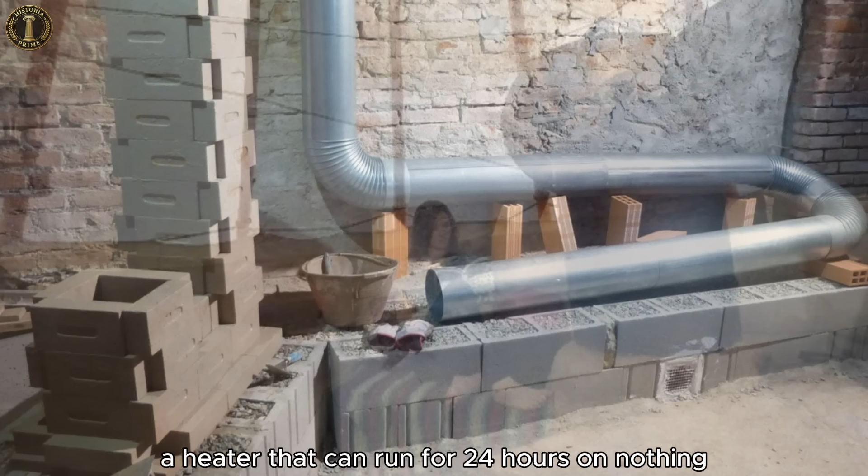Yet thousands of homesteaders quietly rely on it. A heater that produces the same warmth as a modern furnace without a gas line, without electricity, and without the grid. A heater that can run for 24 hours on nothing but an armload of dead branches you gathered for free. This isn't speculation. This is a heating system that burns 80 to 90% less wood than a traditional fireplace.

You light it once in the morning, it roars clean and hot for barely half an hour, and then it stays warm all day and all night, without another touch.

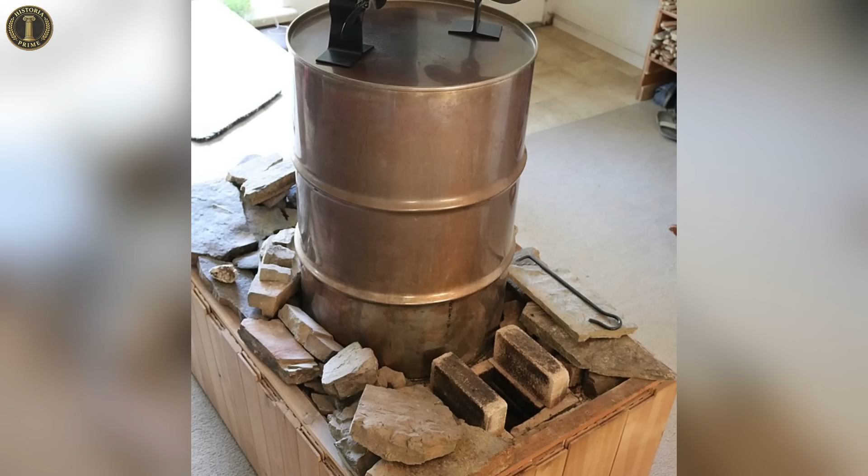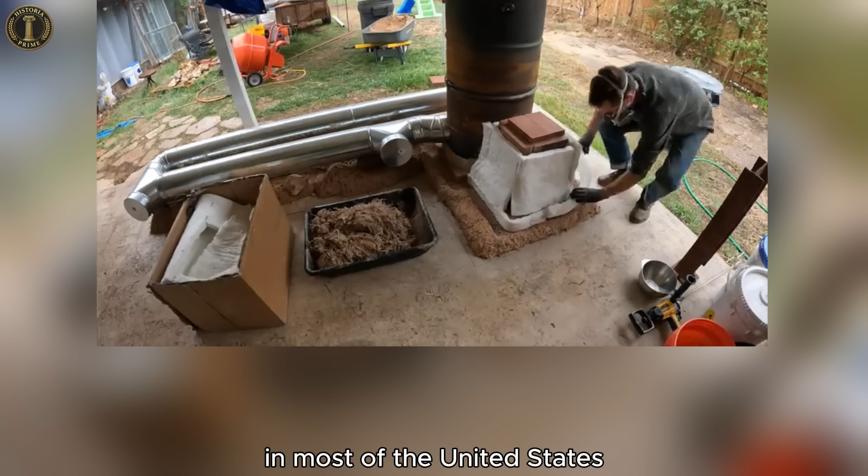People are using it right now to survive winters that freeze entire regions. They build it for under $300, often in a single weekend. But the moment you try to install one legally in most of the United States, you hit an invisible wall, built not by physics, but by an industry that profits from keeping you dependent.

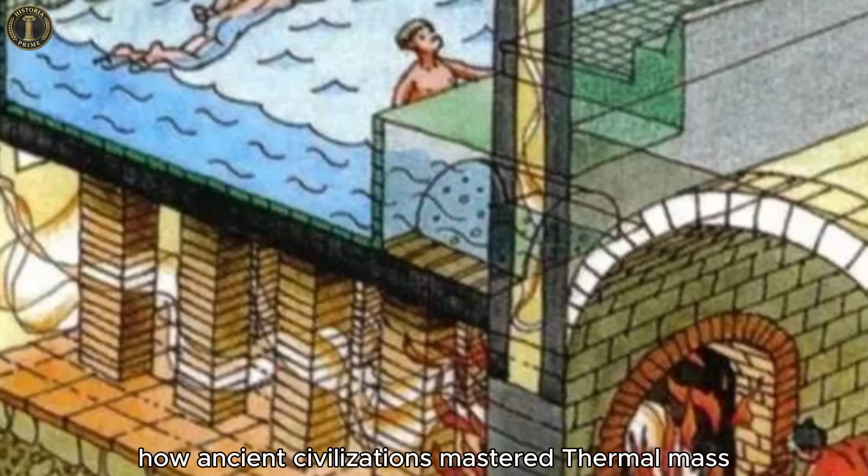Today we journey through ancient engineering, modern rediscovery, and the corporate maze that quietly shaped what you are allowed to heat your home with. This is the story of the rocket mass heater, how ancient civilizations mastered thermal mass, how modern society forgot it, how a handful of renegade engineers revived it, and why powerful interests moved quickly to keep it out of your living room.

By the end, you may find yourself asking a dangerous question. How much of our dependence on modern heating is necessity, and how much of it is a trap we were never meant to escape? Part 1: The Lost Wisdom of the Ancients.

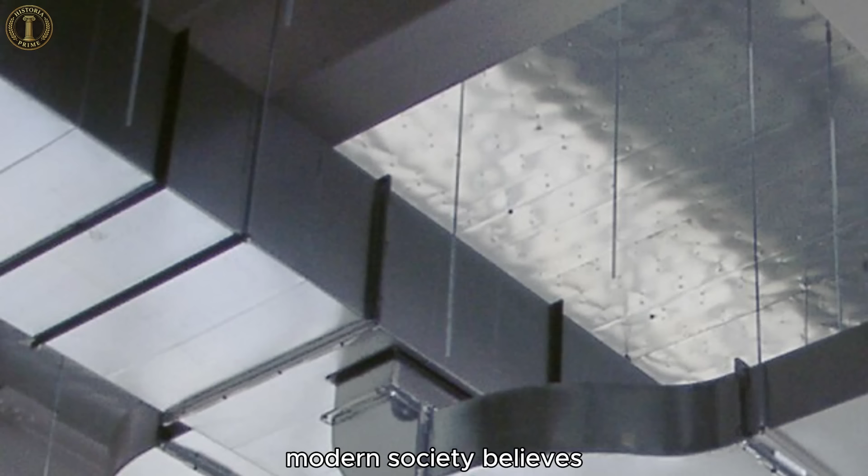To understand why the rocket mass heater is so extraordinary, we have to look back to a time when humanity understood heat very differently. Modern society believes warmth comes from blowing hot air into a room. The ancients knew better. They mastered thermal mass, using stone itself as the heater, long before we forgot the principle.

Travel for a moment to the Roman Empire. Engineers there faced a daunting challenge: keeping vast stone bathhouses warm from dawn until night without feeding fires endlessly. Their solution was the hypocaust, a system whose name means fire beneath. Instead of putting the heat inside the room, they put it under the floor.

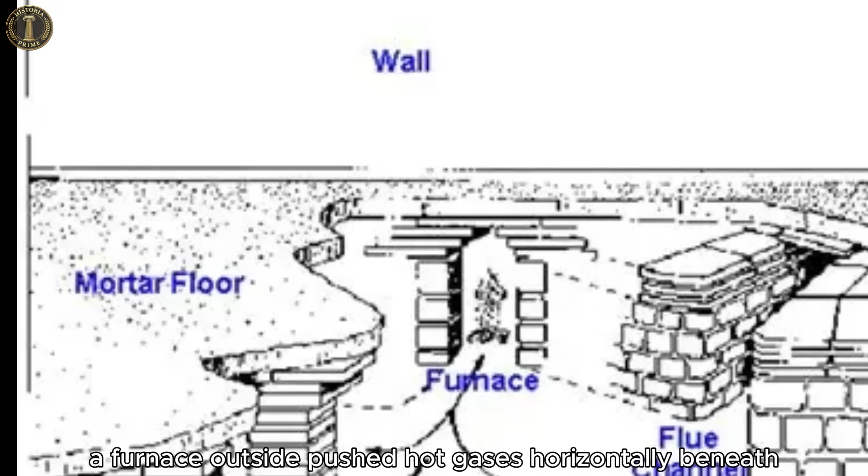The stone floor was lifted on small pillars, creating a hollow space. A furnace outside pushed hot gases horizontally beneath the entire structure, allowing the stone to soak in the heat and release it slowly for hours. Bathers weren't warmed by air, they were warmed by radiant heat from the very bones of the building.

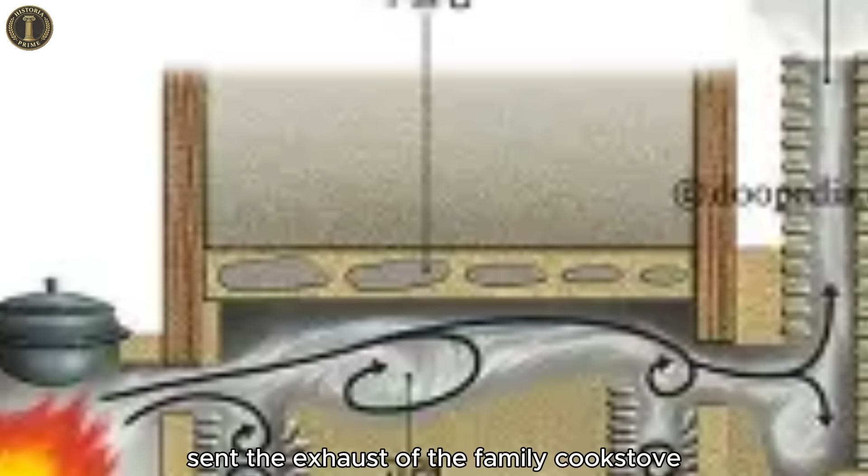Half a world away, ancient Korea arrived at the same principle and refined it for daily life. Their Ondol system sent the exhaust of the family cook stove through winding channels beneath thick stone floors. As the gases cooled on their journey, the stones above grew warm. One evening meal could heat a home until sunrise. The fire was brief; the stored heat was lasting.

Both cultures discovered the same truth: the fire is not the heater, the mass is. The energy is captured, stored, and given back slowly, almost like a natural battery. Nearly all the fuel's heat remains inside the home instead of escaping into the sky.

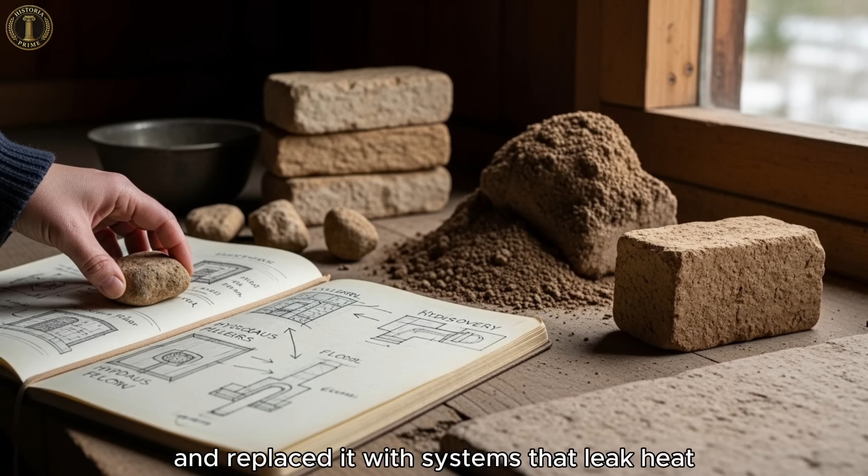This elegant survival technology sustained empires and entire civilizations through brutal winters. Yet in the last century, we abandoned it and replaced it with systems that leak heat, require constant fuel, and fail the moment the grid goes dark. The rocket mass heater is not new. It is a rediscovery of wisdom we once understood instinctively and then forgot.

Part 2: The Modern Amnesia and the Birth of the Rocket.

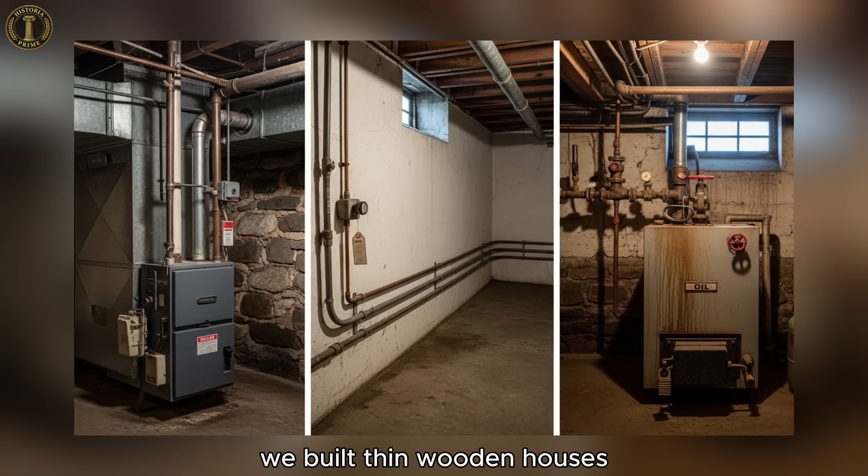When the 20th century arrived, it came with a dangerous illusion that energy was limitless and always available. We built thin wooden houses and filled them with machines designed to blow hot air into empty space. Forced air furnaces, baseboard heaters, oil boilers, systems that worked beautifully right up until the moment the fuel supply faltered.

One winter storm, one downed power line, and a modern American home could turn into a freezing wooden shell in hours. Yet these systems generated profit. They required fuel deliveries, replacement parts, annual maintenance, and constant consumption. A warm stone floor that held heat for free until morning offered no business model.

And so the ancient logic of thermal mass slowly disappeared from our collective memory. But in the 1970s, a small group of ecologists in Oregon began to question the entire structure. The Aprovecho Research Center, founded in 1976, set out to design low-cost, low-tech solutions for communities without reliable electricity. Billions of people still cooked over three stone fires, losing almost all their heat and filling their homes with smoke.

Among Aprovecho's founders was Ianto Evans, a Welsh ecologist steeped in traditions of building with earth. He believed simple materials could outperform industrial systems if guided by the right physics. Their early attempt, the Lorena stove, revealed how unforgiving those physics could be. Its clay walls absorbed too much heat, wasting wood instead of saving it. Efficiency on paper turned into inefficiency in practice.

The turning point came with mechanical engineer Dr. Larry Winiarski. He stripped combustion down to first principles and recognized two universal failures: fires that burn too cool to consume their own smoke, and fireplaces that send most of their heat straight up the chimney. His solution was deceptively simple: make the fire hotter, let it burn more completely, and trap the heat long enough for it to be useful.

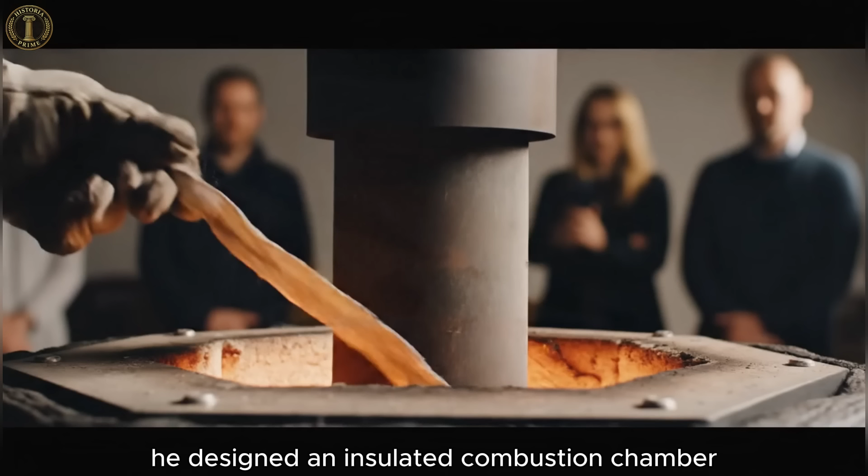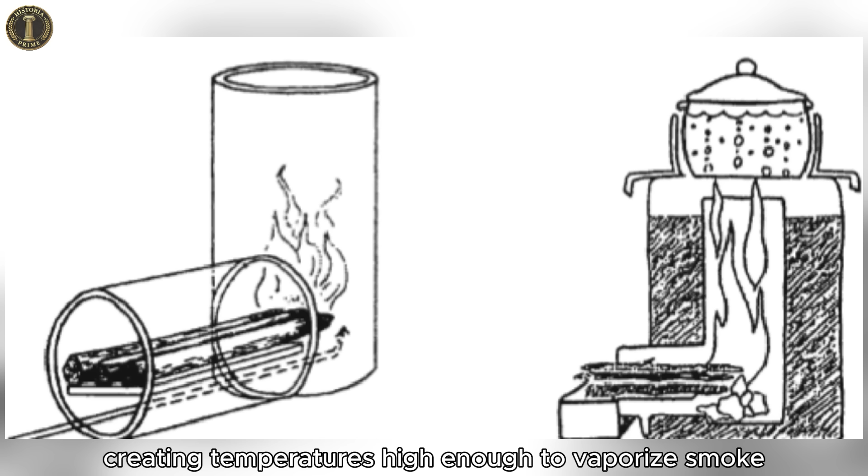He designed an insulated combustion chamber and a J-shaped feed tube that allowed wood to burn sideways and then erupt upward into a superheated internal chimney. The insulation locked the heat inside, creating temperatures high enough to vaporize smoke and generate a powerful natural draft. More draft meant more oxygen meant cleaner combustion, and cleaner combustion meant more usable heat.

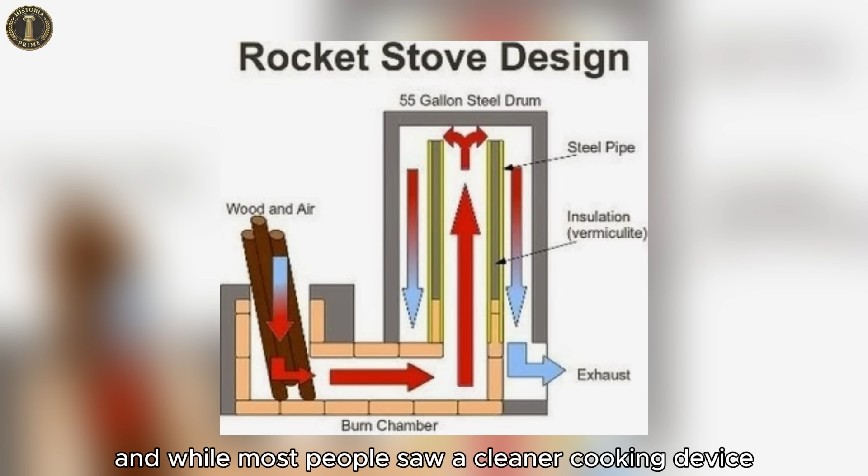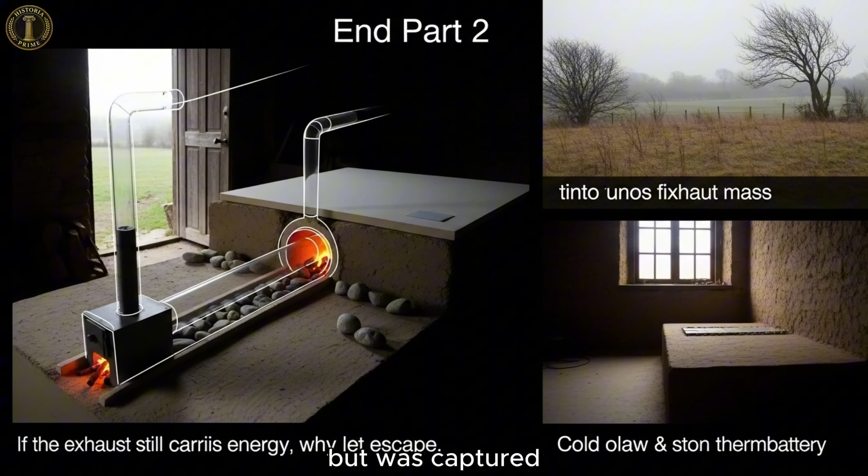When it ran, it sounded like a small jet engine. Tests showed it cut fuel consumption nearly in half. Winiarski called it the rocket stove. And while most people saw a cleaner cooking device, Ianto Evans saw something far bigger. If this fire burned so efficiently, and if its exhaust carried so much energy, then the next question was inevitable: what would happen if that heat weren't allowed to escape at all, but was captured, stored, and slowly released through the night?

Part 3: The Anatomy of a Dragon. There is a flaw at the heart of every conventional wood-burning device. The fire inside them produces enormous heat, yet the hottest, most energy-rich gases escape untouched. In a typical fireplace, exhaust temperatures can exceed 600 degrees Fahrenheit. That is not abstract waste heat.

That is your heat, your fuel, your labor, drifting straight into the sky. Even a modern certified stove still sends hundreds of degrees up the chimney, carrying away most of the energy you meant to keep. Ianto Evans asked a question almost no one else dared to ask: what if that heat didn't escape at all? What if the rocket stove's blazing exhaust could be captured, slowed down, and stored before it ever reached the outside air? Understanding the rocket mass heater is like examining the anatomy of a sleeping dragon.

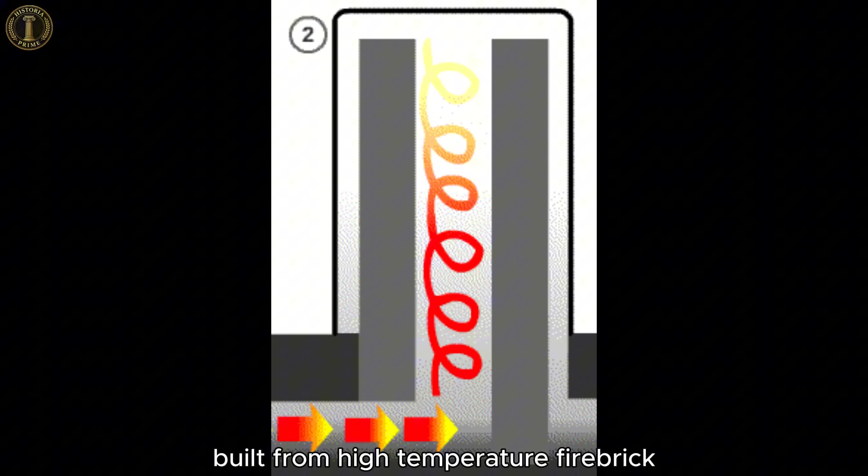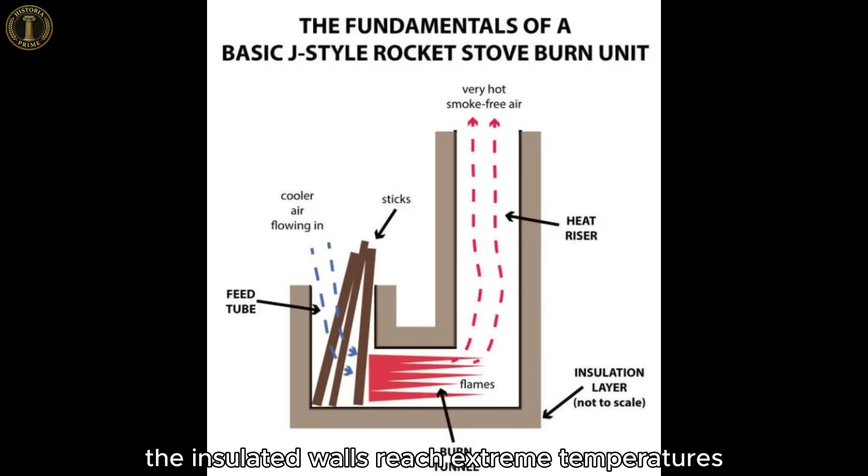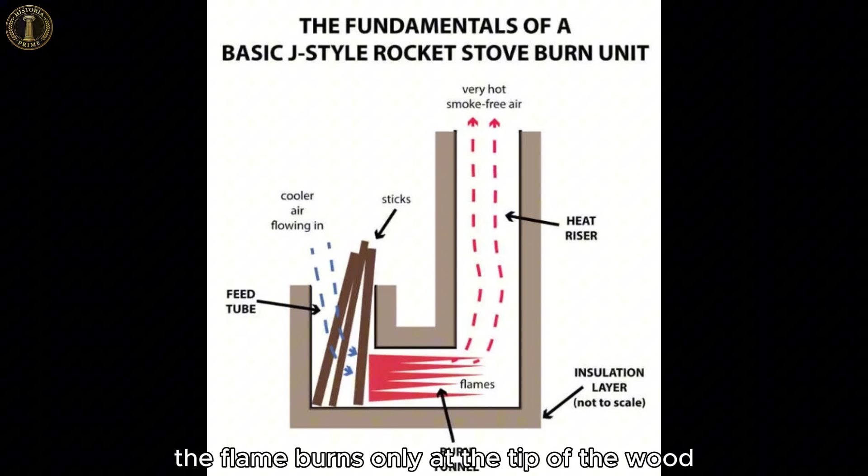At that threshold, the system transforms. The draft strengthens, the feed tube begins pulling oxygen automatically. The flame burns only at the tip of the wood, consuming every molecule of fuel it can reach. Smoke, the sign of wasted energy, disappears into the vortex and is burned completely. The barrel radiates quick, immediate warmth, but the exhaust does something far more interesting. Instead of rising up a chimney, the gases are pushed downward and into a long horizontal run of ducting. That duct snakes through a massive bench of earth, clay, sand, and straw packed together into a dense thermal battery.

As the gases travel 20 or 30 feet through this mass, the earth pulls the heat out of them. By the time they reach the exit chimney, the temperature has dropped to around 100 degrees. What leaves your house is not smoke, but mostly water vapor and carbon dioxide.

Inside the bench, however, all that energy has been stored. Hundreds of pounds of earth slowly warm and then release their heat steadily over the next 12 to 24 hours. The surface stays around 90 to 100 degrees, warm to sit on, safe to touch, and comforting through the coldest nights. With a single 45-minute burn, using an armload of free twigs, an entire home can remain warm while a blizzard howls outside.

No electricity, no gas line, no dependency on the grid. For roughly $300 in materials, anyone can build one. It is efficient, elegant, and astonishingly powerful, an engineering triumph hiding in plain sight.

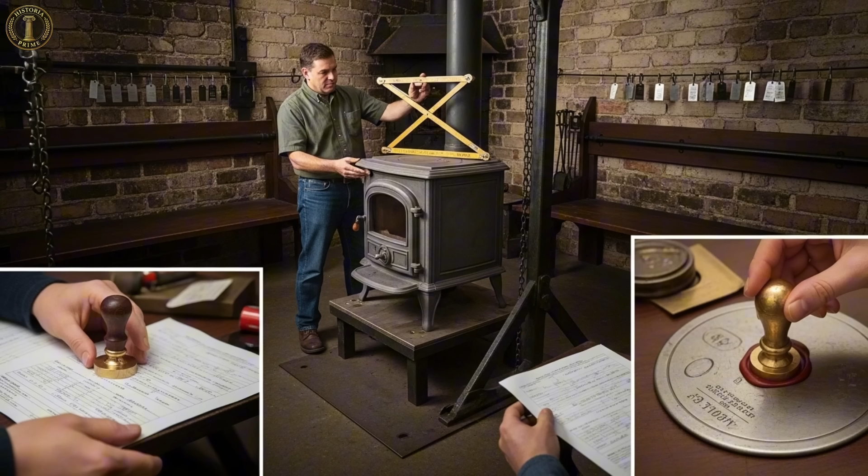This barrier is the International Residential Code, the rulebook that governs nearly every structure built today. And within that code is a simple requirement: any wood-burning appliance must be listed and labeled by an approved testing laboratory. In practice, that means Underwriters Laboratories. UL testing is the golden stamp that makes an appliance legal.

But here is where the system reveals its true shape. Sending a single wood stove through UL testing and EPA emissions certification costs upwards of $50,000. For a corporation producing 10,000 identical stoves, that fee barely registers. It's a business expense. They spread it across their entire product line and move on.

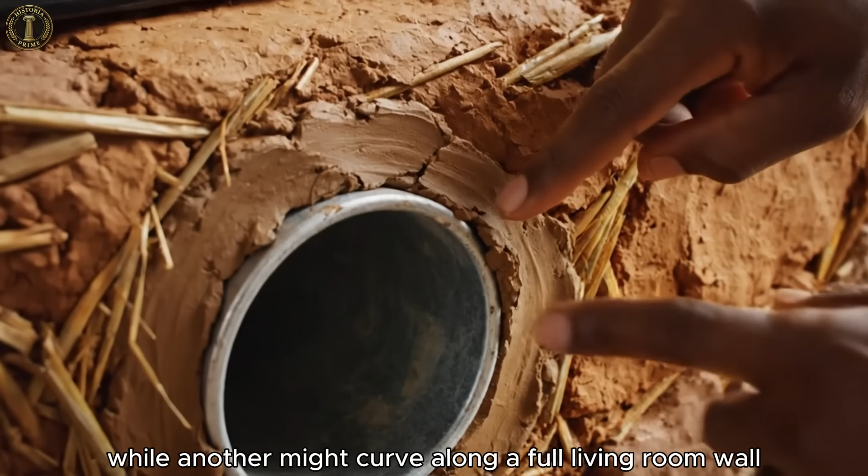A rocket mass heater, however, cannot pass through this system. Not because it is unsafe, but because it isn't a product at all. Every RMH is site-built. One bench might be short and compact for a tiny cabin, while another might curve along a full living room wall. One owner uses clay-rich soil, another uses sandier earth. No two are identical. There is no factory, no assembly line, no model number to certify.

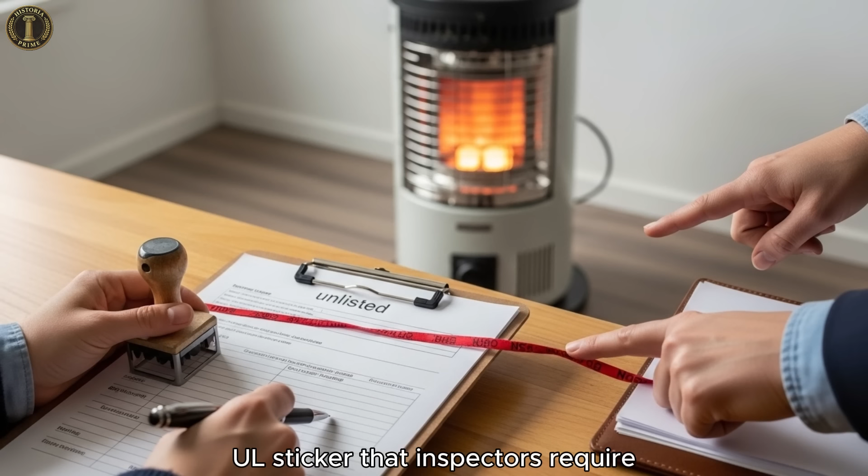And so there is no pathway to attach the magic UL sticker that inspectors require. A building inspector sees cob and ducting and a bench built from the earth beneath your feet, and they are obligated to say the same words every time: unlisted device, tear it out.

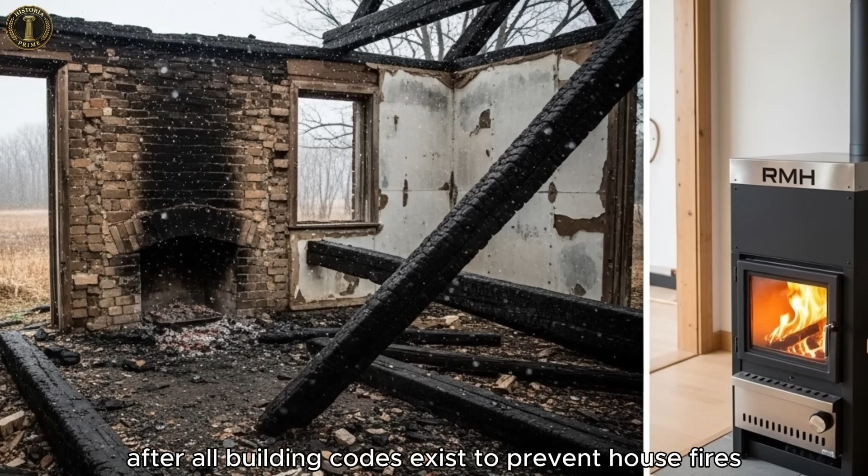At first glance, it sounds like sensible protection. After all, building codes exist to prevent house fires. But the moment you compare these rules to one particular exception, the logic collapses. Because masonry heaters, like the German Kachelofen, operate on almost identical physics. They burn hot and fast, store heat in a massive stone core, and release it slowly over the next 24 hours. They are, in principle, the same thermodynamic machine as the rocket mass heater.

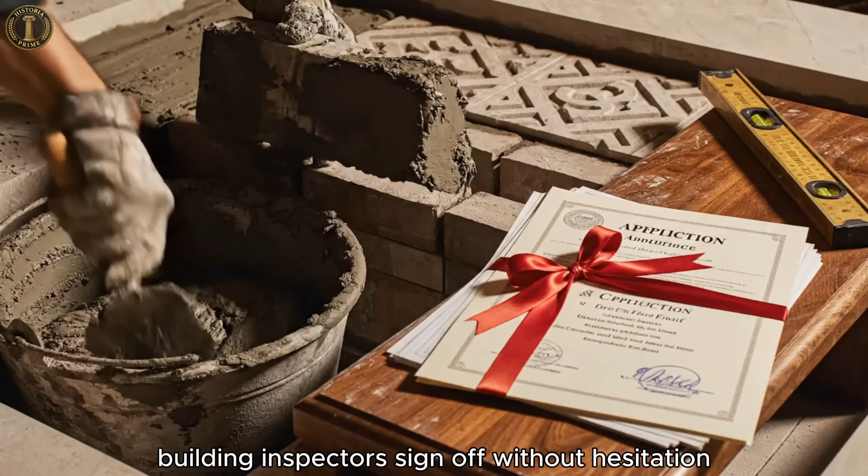Yet masonry heaters are perfectly legal. Insurance companies approve them. Building inspectors sign off without hesitation. They appear in luxury homes across Europe and North America. And the reason has nothing to do with safety or engineering.

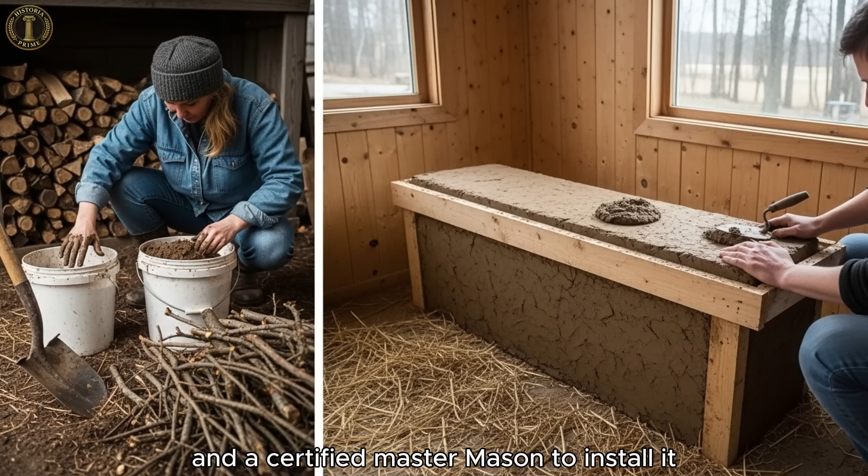A masonry heater costs between $10,000 and $30,000 to build. It requires specialized refractory parts and a certified master mason to install it. A powerful trade organization spent decades lobbying for its inclusion in the code. It fits neatly into the economic structure of the industry.

A rocket mass heater, by contrast, costs $300 and can be built in a weekend by a rural family using earth from their own backyard. It removes dependency. It removes profit. It gives ordinary people the ability to heat their homes without paying a single recurring bill. And that is the difference the code was never designed to handle. Once an RMH is inside your home, its legal shadow follows you everywhere.

Try to sell your house, and the heater becomes a material defect. Try to insure your home, and the company can deny coverage outright. If your house suffers a completely unrelated electrical fire, the dirt bench in your living room gives the adjuster the excuse to void your entire policy.

No one arrests you. No one sends a warning letter. The enforcement is quieter, deeper, and far more effective. It works through paperwork, liability, and fear. It ensures that the one heater designed for ordinary people, clean, cheap, and nearly free to operate, remains locked outside the walls of any home built by the rules.

And so the rocket mass heater is not outlawed by fire, but by the invisible architecture of bureaucracy itself. A system designed to protect homeowners has quietly become the wall that prevents them from ever becoming truly independent.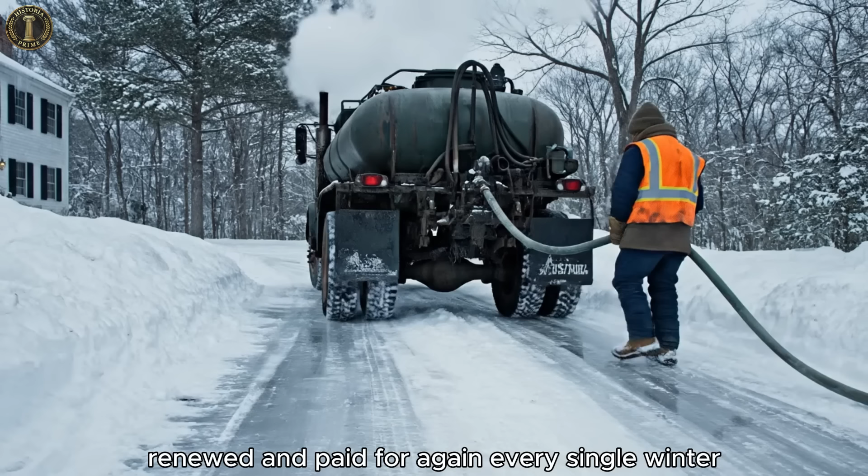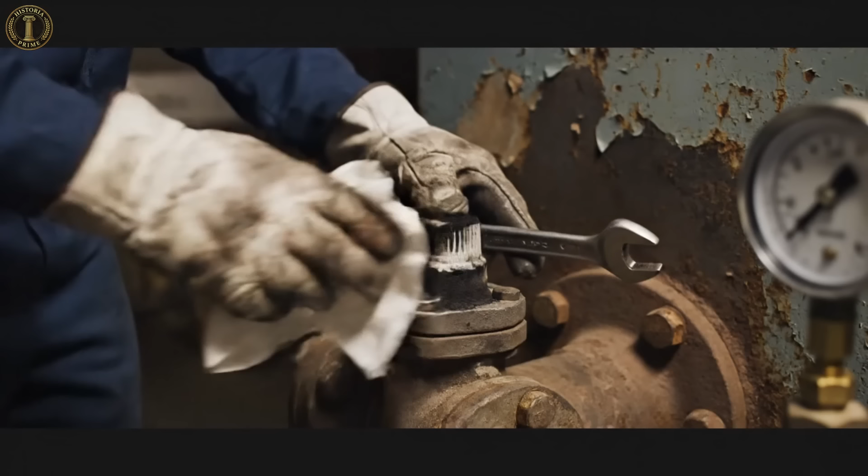We have to look at the modern energy empire, a system that grew by convincing entire nations that warmth itself must be purchased, renewed, and paid for again every single winter. For more than a century, the heating industry has not sold comfort. It has sold dependence. You need their fuel. You need their certified technicians. You need their maintenance plans, replacement parts, and emergency service calls. The system is designed so that every cold night becomes a transaction. Every snowstorm, a reminder that without them, you freeze. And the less you understand about thermodynamics, the easier it is to accept this arrangement as natural.

A global analysis by the research group InfluenceMap revealed how hard these industries fight to preserve that dependence. Across the United States, the European Union, and Australia, fossil fuel companies have poured enormous sums into campaigns meant to block any shift away from gas heating. Whenever a city attempts to electrify new buildings or promote alternative systems, the response comes instantly. Advertising blitzes warn of economic ruin. Lawsuits appear. AstroTurf organizations, fake community groups funded by industry, spread panic and misinformation.

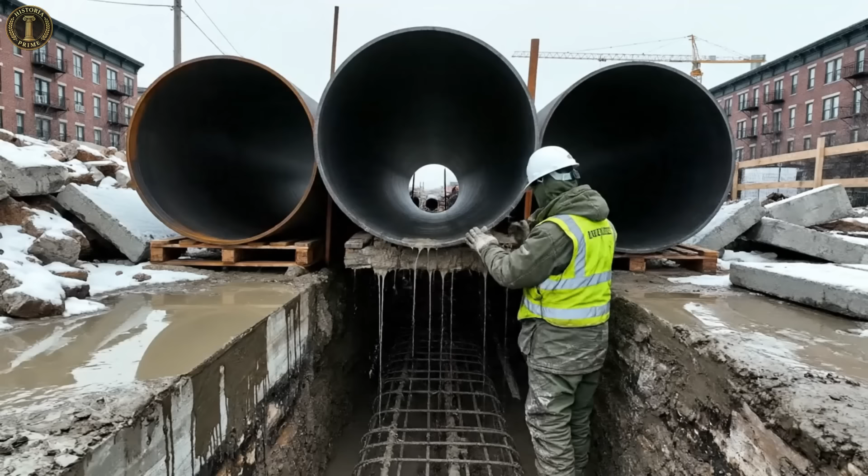In the United States alone, trade associations like the American Gas Association successfully pushed preemption laws through 26 state legislatures. These laws forbid local towns from banning new gas hookups, effectively locking communities into fossil fuel heating whether they want it or not. Between 2010 and 2012, 8 major utilities spent $67 million lobbying Congress to stall clean air regulations that might weaken their position.

When you look at a $30 billion HVAC industry and a natural gas monopoly worth many times more, the threat posed by the rocket mass heater becomes impossible to miss. Because the RMH is not just a better wood stove, it is a quiet revolt. If someone builds a rocket mass heater in their living room, they stop being a customer.

They do not buy propane. They do not need a catalytic wood stove. They do not call the chimney sweep because the RMH burns so completely that there is barely any residue to clean. The ongoing revenue stream disappears. A person who heats their home with twigs gathered from the forest floor becomes invisible to the energy economy.

And in a world built around subscriptions to survival, monthly bills, annual servicing, lifetime dependencies, that kind of independence is profoundly destabilizing. It is no wonder, then, that a device costing $300 and running for nearly free never found a welcome inside the modern heating marketplace. It does not fit the business model. It breaks it. And so the empire pushes back, not with open bans or dramatic headlines, but with quiet pressure, crafted narratives, and rules that select for profit rather than physics.

Because in the end, an appliance that empowers ordinary people, cheap to build, clean to burn, and almost free to operate, is the one thing the industry cannot afford to let become mainstream.

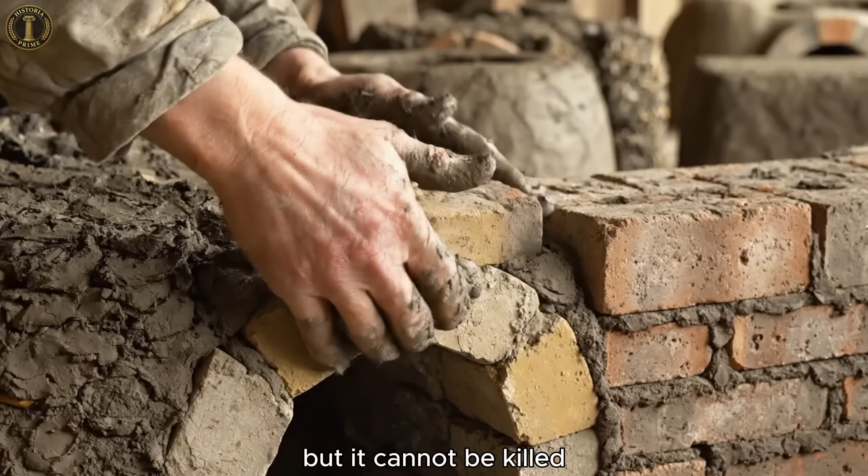For a long time it seemed as though the rocket mass heater would remain trapped behind the invisible wall of modern regulation. Yet physics has a way of resurfacing. A good idea can be buried, but it cannot be killed, especially when a small group of stubborn, brilliant rebels refuses to let it disappear.

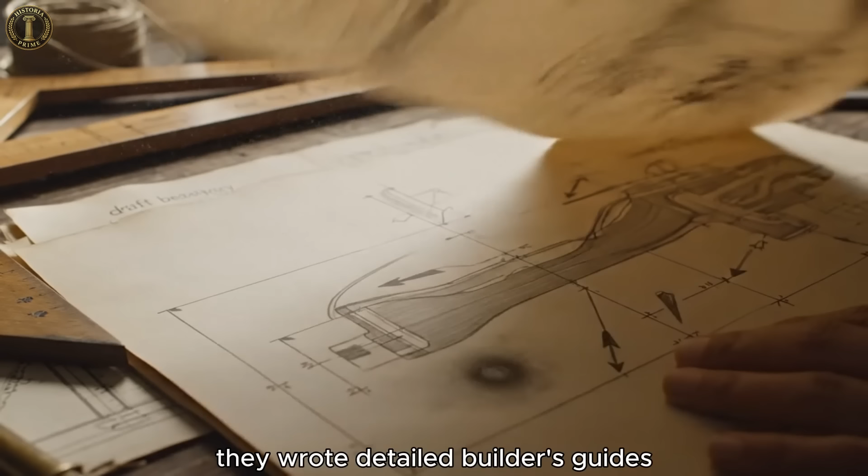For more than 20 years, pioneers like Ernie and Erica Wisner dedicated their lives to proving what the code system insisted on denying. They built more than 700 rocket mass heaters with their own hands. They wrote detailed builder's guides, translating what looked like homesteader folklore into precise engineering language: dimensions, calculations, emissions data, draft behavior, thermal storage curves.

They showed inspectors the math. They demonstrated the tests. They proved, point by point, that the rocket mass heater was simply a variation of the already legal masonry heater, driven by the same thermodynamic principles. And slowly, almost imperceptibly, the ice began to crack.

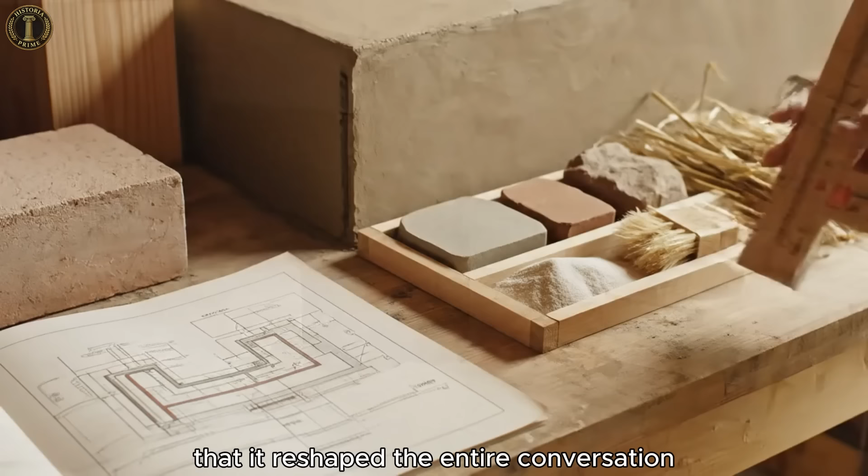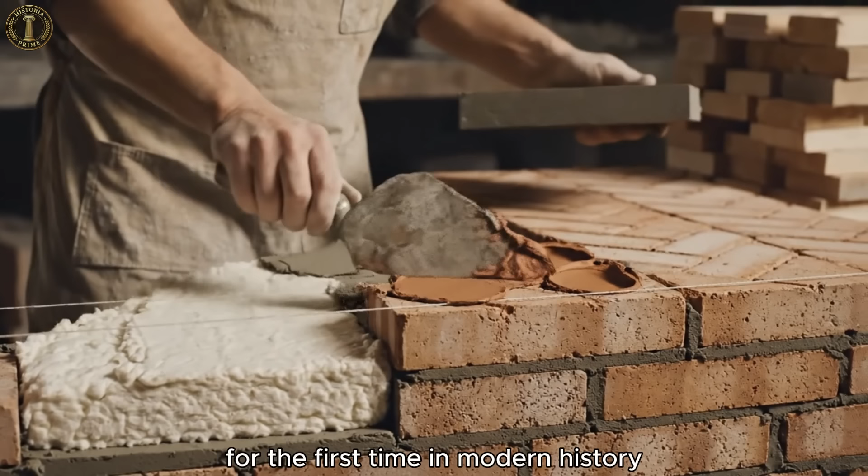In 2023, the International Code Council made a change so quiet that most people never heard about it, yet so significant that it reshaped the entire conversation. They added Appendix X, later refined into Appendix VV in the 2024 Code, to the International Residential Code. For the first time in modern history, the building code formally recognized site-built thermal mass heaters as a legitimate, legal category. The appendix laid out a simple pathway.

Follow these dimensions, use these refractory materials, maintain these clearances to combustible walls, build it exactly as specified, and your rocket mass heater is compliant. No $50,000 UL test, no impossible bureaucratic gauntlet, just engineering executed correctly.

It was a monumental victory for everyone who believed that warmth did not have to come with a subscription fee. It was proof that data, persistence, and physics could eventually pry open even the most rigid regulatory systems.

Yet the triumph came with a reminder. The IRC is a model code, not a mandate. States and counties must choose to adopt the appendix voluntarily. And as of late 2024, only a handful of places, Vermont, Alaska, pockets of the Pacific Northwest, and parts of New Mexico, had taken that step.

The wall has not fallen. The system of dependence has not vanished. But for the first time in 30 years, there is a door. Small, now, but real. And when a technology capable of heating a home for pennies finally finds even the smallest legal foothold, one thing becomes certain: the story is no longer about suppression, it is now about momentum.